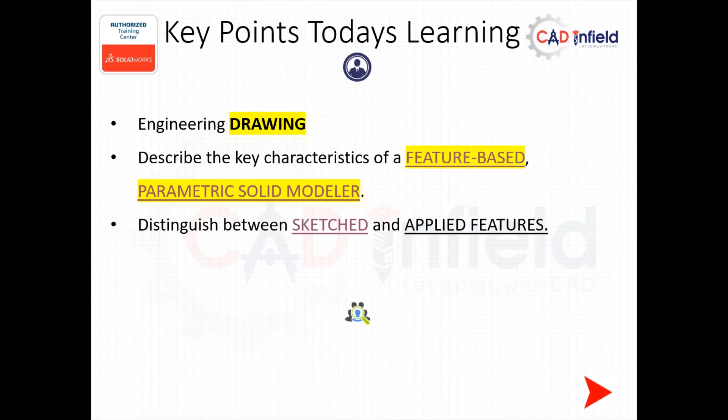We will also focus on basics, geometry, and shapes throughout the curriculum. We'd like to highlight topics related to CAD, such as what are sketch-based features, and what are the features responsible for applied features on top of features, so called applied features. I would like to brief you on some terms of it.

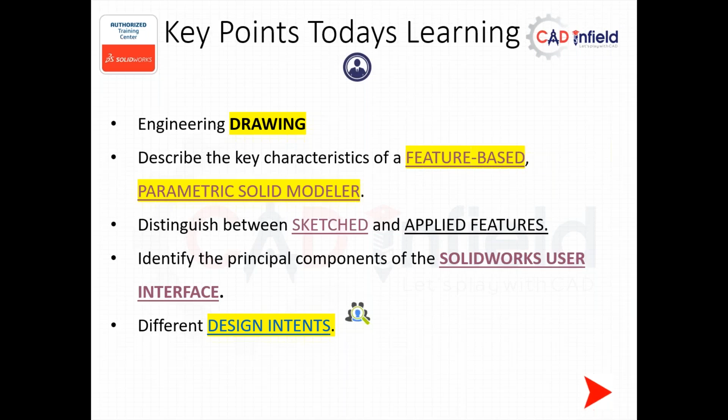Apart from this, I would also like to highlight the user interface of SolidWorks, and you will get the key highlights of it. Very importantly, I will call this a very important skill set, called design intent, and how this design intent is important in current industrial requirements, which I would like to highlight to you.

Finally, we will summarize with dimensioning methods, and conclude many parts of it through summarization. These are the few things I would like to highlight as the initial skill set and understanding of CAD and parametric design required, because traditional CAD is now obsolete. Now you need to think about parametric CAD. So let's click and start with engineering drawing.

So basically you people know that engineering drawing is mostly commonly referred to as engineering graphics in your curriculum. There are various terms used in industry for engineering graphics. Engineering drawing mostly communicates the information about an object. It is the most important aspect of mechanical engineering, as it is the fundamental need required to design and develop any single component for a machine or mechanical system.

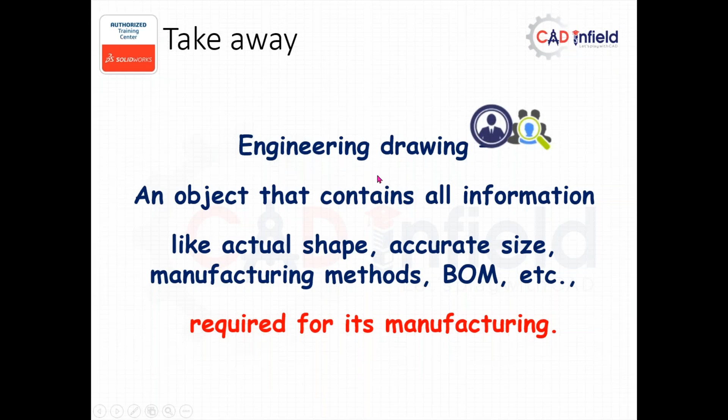By seeing a drawing as an engineer, you should be able to imagine the method of manufacturing it. Remember, this is a highly important part of it. Apart from the engineering drawing, if you are doing an assembly, then there's a mechanical BOM, call it an engineering BOM, and you should understand that as well. So let's add some more focus on the drawing part of it, and let's begin with this. In industry, in engineering drawing, mainly there are two subsets. I'm 100% focusing on the industrial requirement, based on what I learned through my past 12, 13, 14 years of design experience. So mainly there are two subsets of any component.

When we call it an individual component, a part, to represent the part we need a part drawing. To represent the assembly, we need an assembly drawing. If we consider the part drawing, we call this a machining drawing. All the components where parts are made with machining, for example lathe, milling, planer, shaper, drilling, all those traditional machining methods, or even CNC, where material is removed in terms of chips. These are the first criteria of engineering drawing drafting, which is all as per industry standard.

Next, there are sets of drawings which we call sheet metal drawings. We know that when a part, or plate thickness, is less than 5 mm, we perform various forming operations for it, such as bending, punching, blanking, notching, lancing, perforating. There are a lot of operations, where material is not removed in terms of chips, but formed instead. They use bending operation to create a blank, then do punching for all the holes, and notching to remove sharp corners. But all those operations don't remove material as chips, they form it. So there is some importance of sheet metal drawing in the industry, and how to represent that is an industrial requirement.

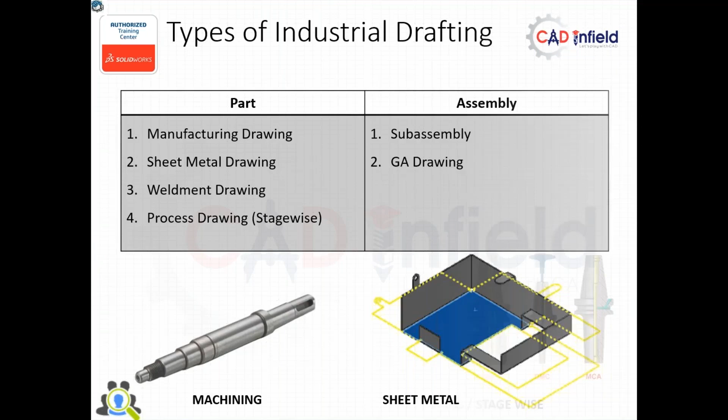Later part of it is the fabrication drawing. We call it weldment. I will showcase this to you also. Basically, just see this structural example. This allows you to create some amazing fabrication or structural drawing. You can't imagine this being made with the machining method. This kind of structure, can you create it with forming? No. Can you create it with machining? Not possible. Even welding is an essential component of the manufacturing industry.

Even machine beds, SPMs, robotics, automobile industries with chassis and structure, construction industry, aviation, marine industry, and many more, where without welding their work cannot be processed, because many complicated base structures, platforms, chassis, building structures, gates, fences, kitchen applications, appliances, vehicles - around 70% of components across industrial requirements cannot be made with machining or forming alone. We require weldment or structural fabrication for this. So this is a very important skill set required for industry: how do you create structural fabrications, how do you create the weldment? We call it a cut list or BOM for all the cut parts. That is also a very important thing.

Next part of it is process drawing. I've given one example where components are manufactured in a batch size, or in a lot, where n number of machines are in a series with n number of resources allotted. Remember the days you learned operation research subject - n machines, n number of resources and all. So one component is fixed initially at a chuck, operations performed on one side, then other operations performed on the other side, using traditional or CNC, VMC with multi-axis 2, 3, 4, 5, even now 7-axis CNC machines. You need to perform the operation, but you will not remove the component from the machining. All the required information related to that specific operation is provided on that drawing - only related with that machining itself, that machining drawing.

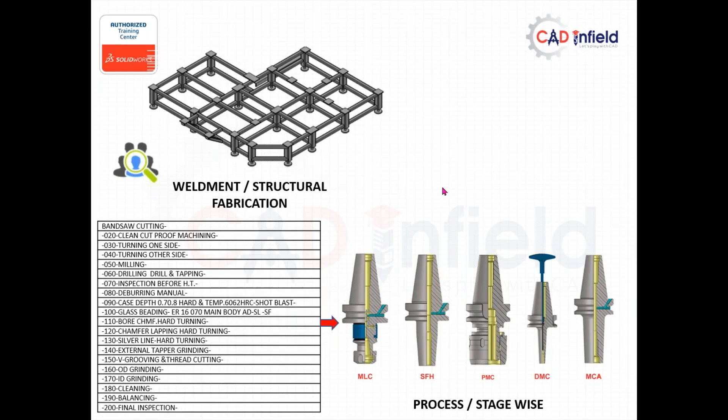Basically, any drawing element has a view, dimensions, tolerances, geometric symbols, finish, title block, annotations, and other things. And if we have an assembly, we need a BOM, exploded views, locating dimensions and all.

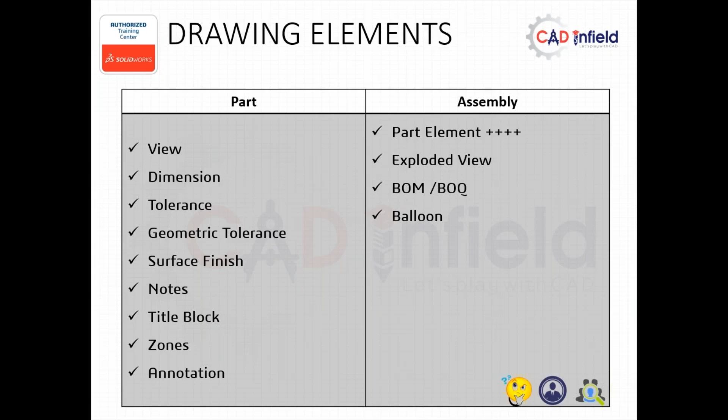But the most important thing is which drawing contains what kind of information. Because if we are going for a sheet metal drawing, apart from the view and dimensions, they also require a fabrication or development drawing, which you have to learn in machine drawing.

So they require a development drawing. Someone called it a flattened view of it. So for sheet metal drawing, if you are working on fabrication for sheet metal, the most important thing you have to highlight is the fabrication drawing.

And if you are working on a structure, there is no need to put up the fabrication or flattened drawing. You need to provide the cut list, meaning what is the section size, what are the dimensions associated with it. You need to provide the bill of material, called a cut list, because a weldment is a structure.

Few components are C channel, few are L angle, few are I beam. So you need the exact length of where to cut, and then you will get all the entire things over there.

So the core importance is, if it is machining, we require view, dimensions, tolerances, geometric symbols. But for machining, there is no requirement of any flat or cut list concept. There are no multiple bodies in machining.

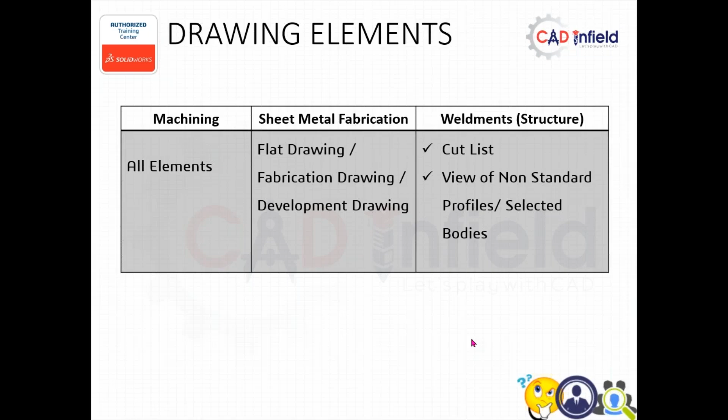Apart from this, I have highlighted a very easy way to understand these sizes, because many times for a fresher, a company is going to ask you the random size for A1, but I will tell you to just remember one size of it.

For example, normally we remember the size of A4, which is 210 into 297.

If you remember only one size, you can quickly learn the rest. A3 is equal to 2 times A4. It means we need to understand that if two A4 papers come together, we get the A3 size.

We know that A4 dimension is 210 into 297. Which is the highest number between 210 and 297? Obviously 297 is the highest. So for A3, the first dimension is the highest number of A4, which is 297, and whatever the lower dimension is, you double it.

Here you can see my mouse cursor, I can highlight through some spotlight. We know A4 is 210 into 297, but for A3, the highest of this is 297. I have taken 297 here, and 210 I have doubled it, so 210 doubled is 420.

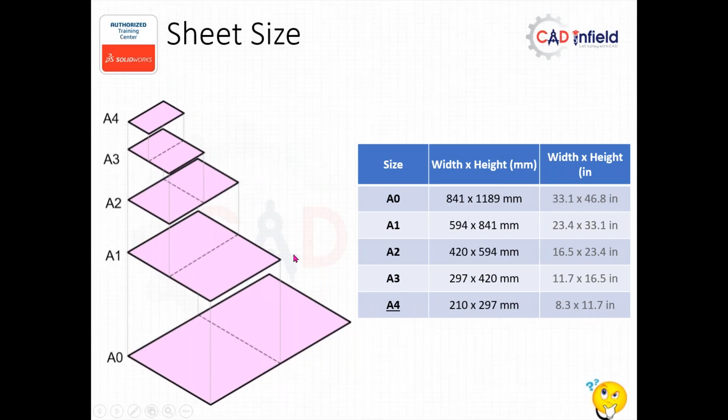The most important part, I will not highlight too much about it, just come with my normal drawing pad. The more is a projection method. Remember, this is for a fresher. This is a very important question, what is the projection method, because this depends upon the industry.

In a globalization world, many engineering services companies are working, sometimes on a UK British project, sometimes on a US project, or Singapore. UK or British people usually prefer the first angle method, but US people prefer the other. So we get confused about this, and you need to be fundamentally clear about the symbol also.

You must imagine what is the first angle symbol, what is the third angle symbol, how to draw that one. It's basically a custom frustum of a cone. This has a drawing, this has a skill set. There are two things I will tell you which will help ensure you never forget the symbol.

Always remember, this symbol does not have any dotted line. This is my first rule, this symbol does not have any dotted line in a symbol.

Second thing is that the observer direction is always from the apex side, or whatever the frustum of cone, the smaller size of the frustum is my observer direction. We know the rule.

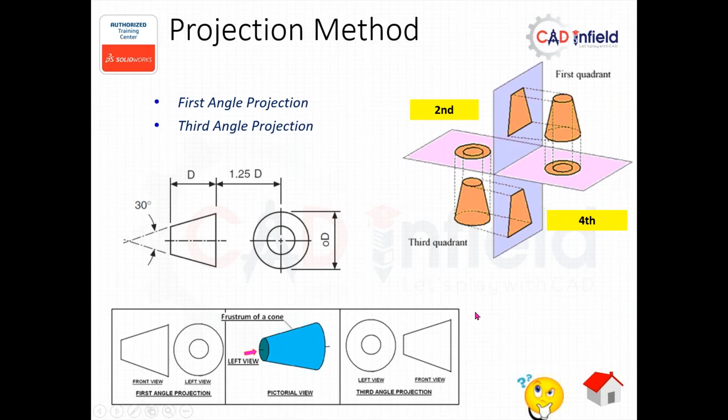So let us focus now on feature based modeling and what is parametric. We have spent a lot of time fundamentally on the drawing subject, because I feel that if you are a mechanical engineer, this is a must for you. You must be excellent in drawing, because whenever you work, whether in design or manufacturing, your communication language is drawing. This is a must criteria.

So let us focus on what is feature based modeling. The other name for feature based is history based software, or history based modeling. There are various researches currently going on. A model can be built by means of features. These features, technologically in terms of manufacturing, we call extrude, cut, hole, fillet, where we need to add or remove material from the component or raw material. At present, feature based modeling is one of the most common techniques used to create the solid geometry.

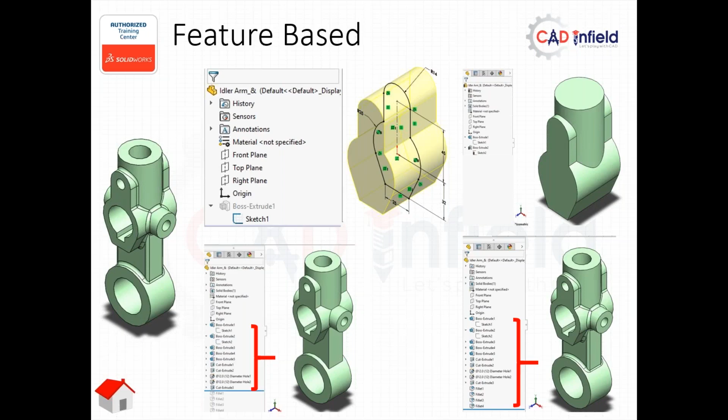Let's move on. The most important term is parametric solid modeling - very important, that's why it has a very high advantage. So what is parametric? Parametric is a term describing the dimension's ability to change the shape of the model geometry. As soon as you change the dimension value, your component will get modified. Understand, parametric is a term used to describe the dimension's ability to change the shape.

And to change the shape, we need to change the sketch. Sketches are created by using dimensions. So if we modify the sketch, automatically the geometry will get modified. Parametric modeling is also a modeling process with the ability to change the shape and size of the object as soon as you modify the dimension.

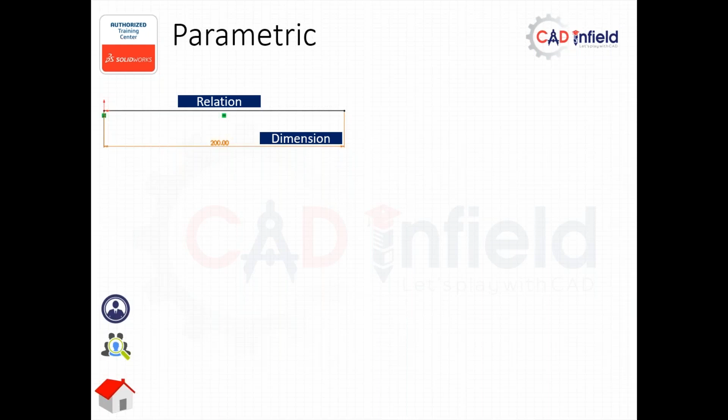Let's see the key advantage. If we go through the advantage of parametric modeling, it is basically used to set up a 3D geometric model. The shape of the model geometry can be changed as soon as the parameter or dimension gets changed. There is no need to redraw the sketch or redraw the geometry, and this saves a great amount of time for a design engineer. Even in the current globalization era, people need a quotation within a day or within two hours, else the competitor will kill the business opportunity.

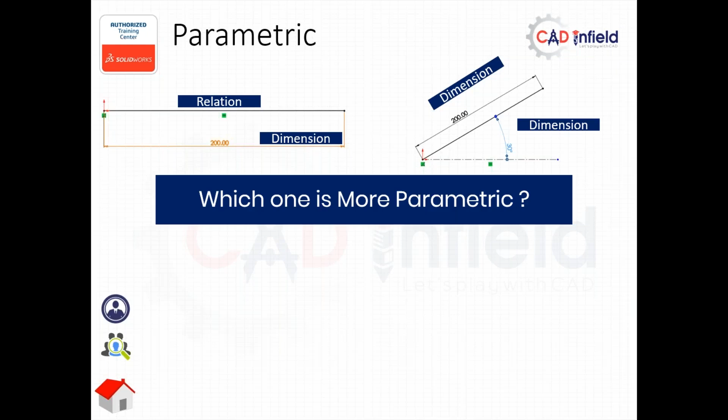So for parametric, I have given two examples here. In one, I have shown you the line with a length, with a dimension and relation. In the second, the line is defined with the help of two dimensions. So my question is very simple: which one is more parametric to you people? Can you think about which one is more parametric?

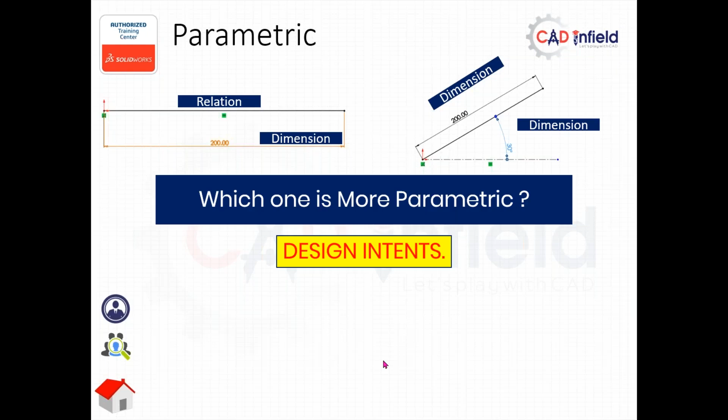Okay, let us have one example. Just let me change a few images. Have you seen these three images? My company is into material handling. I will give you the practical scenario. My company used to manufacture material handling equipment.

Basically, suppose my current object is a conveyor. So my product is a conveyor. Sometimes I used to get orders which are completely a horizontal conveyor, and sometimes I get orders related with the inclined, which we call a gravity conveyor. Mostly people use it where there is no need for any kind of motor. Due to gravity, the component will come down automatically. So what would you do in such cases? Because if you have a gravity conveyor and a horizontal conveyor as the same product, only sometimes you need to change the height of the conveyor, only on that one side.

So at that time, how can you say that your first relation will be okay? So, to specifically highlight the point, which one is more parametric? I say both lines are parametric. Understand what parametric means? Here we need to change the dimensions, but while creating the geometry, we need to think about the design intent. What does design intent mean? Design intent is all about how we can modify our existing design easily, so that a new design can be very easily created.

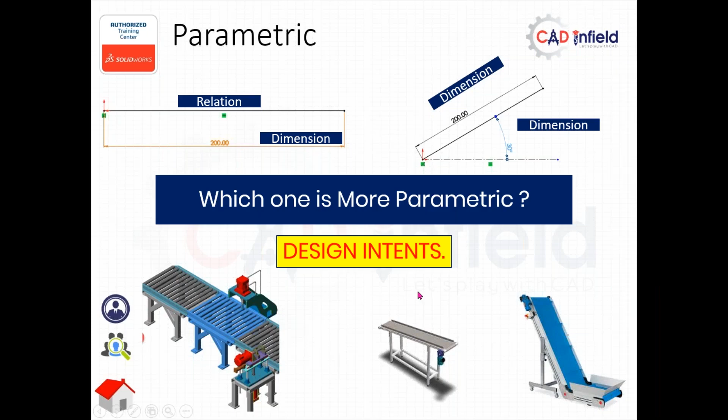For parametric, let's go a little ahead. If you consider parametric, there are two terms: driving and driven. Driving means those dimensions where the user has to input - I repeat, those dimensions where the user has to input. And driven means there are certain rules, logics, mathematics, trigonometric formula, some mechanical formula, whatever calculations, which depend upon the driving variable.

For example, suppose we have a plate with length 100mm, width 80mm, and we define a relation where length is my input, so I call it driving, and my width is always 80% or 0.8 of length, and my thickness is length divided by 10, or 0.1 of length. So if I have 100mm as the length of the plate, width automatically becomes 80.

If I change that 100 to 120, if my length of the plate is 120, I've defined a relation: 120 into 0.8 equals 96. And thickness is length divided by 10, so with 120 as my length, my thickness automatically comes as 12.

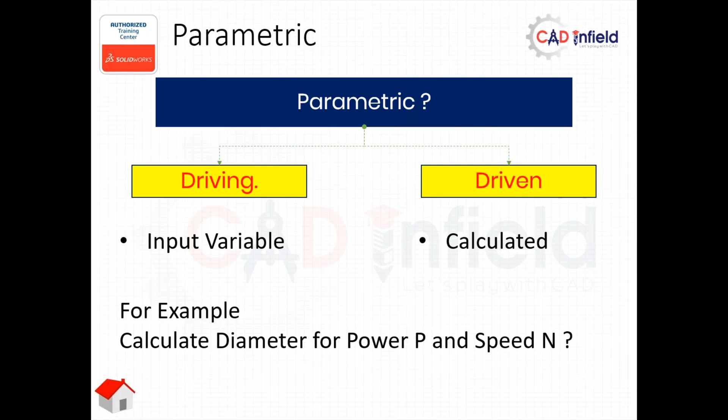Let's have a very interesting example. This is the problem: we need to calculate the raw material size where the shaft basically transmits a power of almost 200 kilowatt at 1200 RPM. Find the suitable diameter, given the maximum torque transmitted.

You might have heard the term factor of safety. Whenever we design a shaft for a ductile material, almost all the time it is ductile, we always consider this. If we know we want to design for a torque of X Newton meter, that's always my requirement, but I will never design based on exactly X Newton meter. I always add a service factor based on my environmental condition.

I will either take it as 2x or 1.3x or 1.2x. There are 2-3 service factors, either 1.2, 1.3, or 1.4.

So here, whatever torque is generated based on the 200 kilowatt power and 1200 RPM, we will get a certain torque. But if we design on that same torque, we won't have any factor of safety. So the condition is that you add 30% extra torque and then design, so that you become safer and get a good factor of safety for the design.

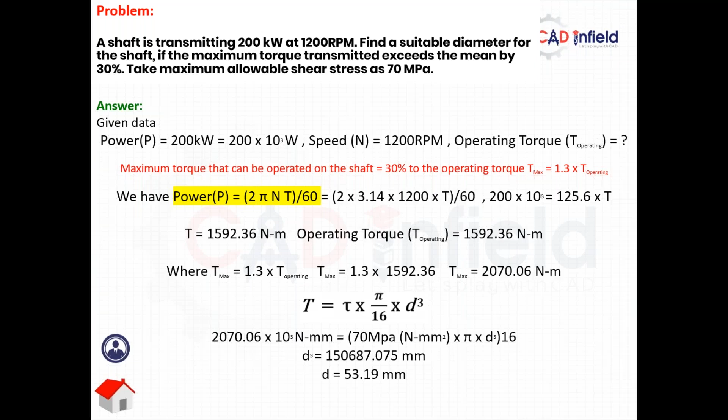Then we have to go for standard raw material shapes. From a raw material I cannot go into a lower size, because if I go into a lower size, I am already calling the failure towards me, and I also need to sleep. Because what happens if I design it, it's manufactured, and during working condition it fails, you can't imagine what will happen next.

I have gone through various such situations, and it's a very difficult time for designers. So he always thinks about some factor of safety, asks a few of his seniors, and then they design it accordingly. So this is what he has to think about, the calculation and what is needed.

Not only is calculation important, but you need to ensure whether the specific size diameter is available in a standard one. For the diameter we require a coupling, we require a bearing. So what is the standard size available for bearing? Whatever shaft we design, is a similar standard bearing available for that dimension, yes or no. Is a standard coupling available, yes or no?

Because you can't use non-standard items, since non-standard items increase the cost, increase the time, increase the delay. And if in service condition a non-standard item fails, we need to either maintain an inventory, or imagine a motor-gearbox coupling used for a crane — if that coupling fails, what will happen? You can't run the machine until it's replaced.

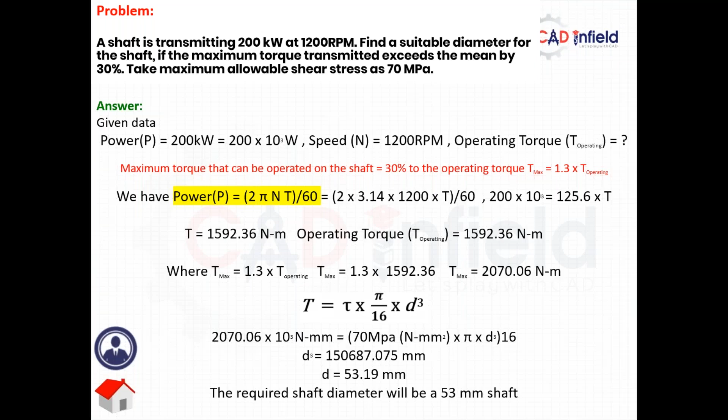And if it is custom made, meaning made for a specific purpose, imagine till the time — if you have inventory inside, okay, but if you do not have inventory, you can't imagine the pressure that comes. It's highly difficult. These terms are extremely important as far as the industry is concerned.

That's why I have focused on parametric feature-based history. It's a step-by-step procedure, whether it's a CAD modeling method or a manufacturing method. For a revolved or cylindrical component, a symmetric component, the term is called a feature. I'll tell you more about that later.

The next part of it relates to CAD sketch features. What does sketch mean? It means for any geometry — if I want to draw any geometry, I need two things: a geometry as well as a dimension for it. So how do we handle all of this?

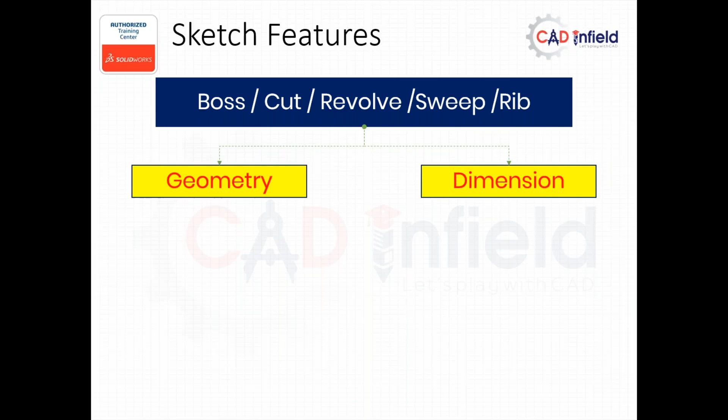Geometry means we have some basic shapes — for example, a cylinder, a cone, a pyramid. Or we need to use a combination of basic shapes, and from that combination we can get a specific geometry. So understanding the geometry is key. Tomorrow's class will focus on various sketch relations and their geometry. My first purpose is always to tell students to focus on geometry first, because if you know the geometry well, you can be a very good designer. We are not interested in you people becoming just a modeler.

Okay, so for a designer, geometry understanding and design calculation understanding is the most important criteria.

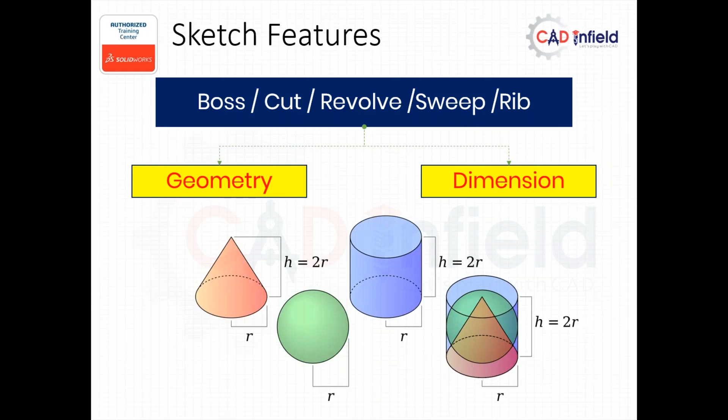Sketch-based features are those features which require a sketch to be drawn. For example, I require a plate - so I have to first decide whether it is rectangular or square. If I want a circular plate, I need to draw a circle, or a triangle, pentagon, whatever. I want a cutout - whether it is a circular or square cutout, what kind of cutout? I want a revolve - whether it is a single step shaft, or a 2-3 step shaft. So anything which requires a sketch to be drawn is called a sketch based feature. Very simple term - you initially need to draw a sketch, that's called a sketch based feature.

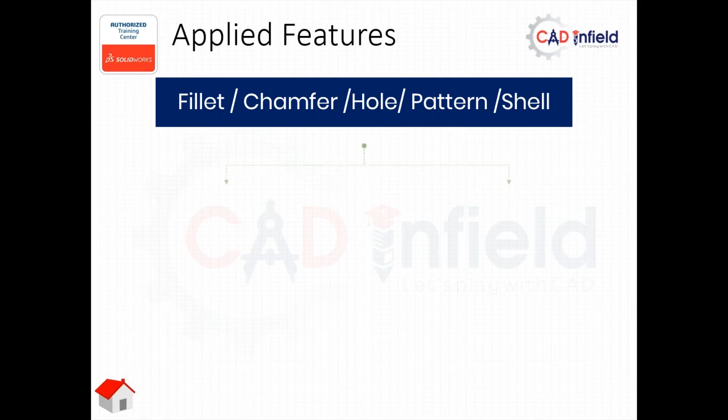Applied feature - it means what? You already had created a few features, and now you want to create a few features on top of an existing feature. So I have an existing geometry and a dimension input. For dimension input, I mean I have an edge and I want to do a fillet. I have a face and I want to do a hole. I have a box and I want to do a shell. So either I have an existing geometry and one dimension input which is required for an applied feature.

It means for fillet, I have a radius. For chamfer, I have a dimension. For a hole, I have an M8, M10, or whatever size. For pattern, what is along X, what is along Y, what is the pitch - those dimensions I have.

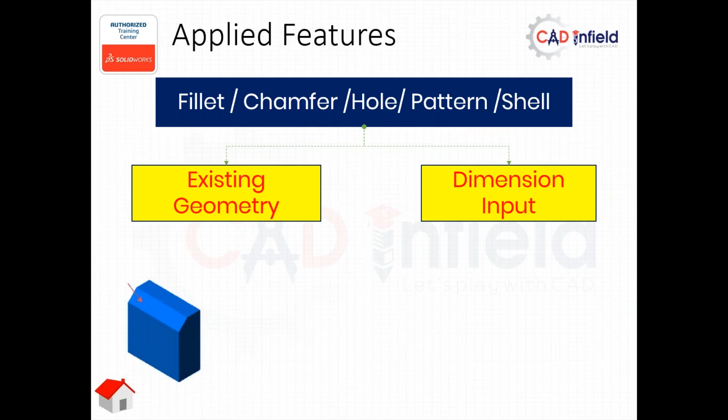So all those things - I have existing geometry, I did a fillet chamfer. I have existing geometry, I did a fillet. I have existing geometry, I did a hole. I have existing geometry, I did a shell. So all those things do not require any sketch to be drawn. Here I only have to select the edge. Here I only have to select the face. So that is called a feature based or applied feature - a feature on top of feature. It does not require any geometry to be drawn; it will draw automatically. You just need to select either a face or edge of the component and you are done with it. Very interesting, very easy to understand.

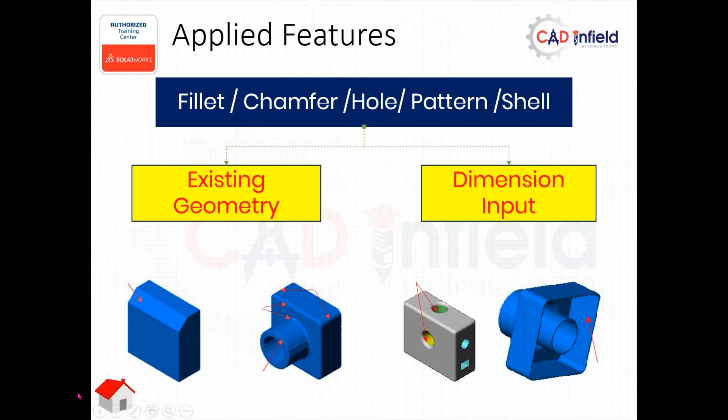Once I have selected the part, I get one graphics UI which is constant. You can change the color combinations and all those things. We have only one graphical area where we draw the sketch, part, assembly, everything. Currently I am inside a part, so I will obviously create either a sketch or a feature on top of it.

Next, every software has a menu button - Word, Excel, PowerPoint, everything. You have File, Edit, View, Window, Help - all options available. So that is called the menu bar, which is on top of every software everywhere. This is common here also.

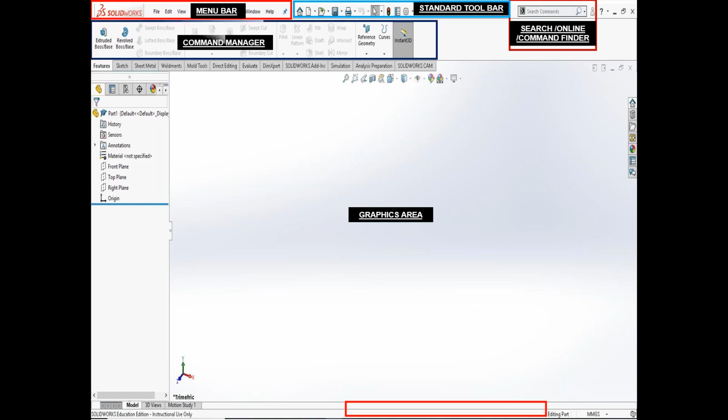SolidWorks very handsomely has, first, a command manager. This command manager changes specific to the command tab, which is highlighted in yellow color. So command manager and command tab: every time if you select a feature from the command tab, you will get all the commands related with the feature. If you select sketch, you get all commands related with sketch. If you select sheet metal, you get all the tools related with forming tools. If you select cam, you get all the tools related with cam. So very intuitively, all these commands and their location are very fixed.

This is on your top, which is called the heads up toolbar. Many times you require zoom in, you need to change views, create a section view, you need isometric, front view, top view, show or hide plane, axis, set sketches, CG, many things. There are many shortcuts also available, but all those things you can get here. Even you can change the background, create something new, utilize a machine shop background — everything is possible in the heads up toolbar menu.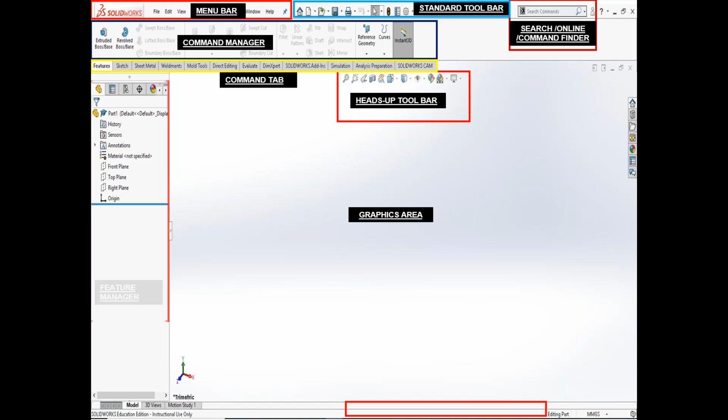Very handsomely designed, and this is the most important one: the feature manager. This feature manager again is subset into different commands — I will go into my next slide where I will explain in detail. The reference triad, which is at the bottom, gives information about the plane, your coordinate system, X, Y, Z points, from which you can specifically go into the plane. If you select front view, it will give you X, Y. If you are in top view, it will give you X, Z. All depends on this, so that you know whether you are working on positive X or negative X, positive Y, all related to the coordinate system. Don't worry too much about it.

This is the standard document window, and the document window is basically where you need to create the graphics. SolidWorks always has a single document window for creating the 3D geometry, but simultaneously, if you want to create some mechanism, animation, or motion, definitely there are n number of motion studies — 1, 2, 3, 4. You will get it even for FEA, you will get multiple windows, but for modeling geometry, you will get only a single environment in SolidWorks. This is an interview question asked sometimes.

So another part of it is what we call a task pane. Many times the task pane is used to speed up operations. Task means something which needs to be done very fast, very accurately, very quickly. So those things we can get in the task pane.

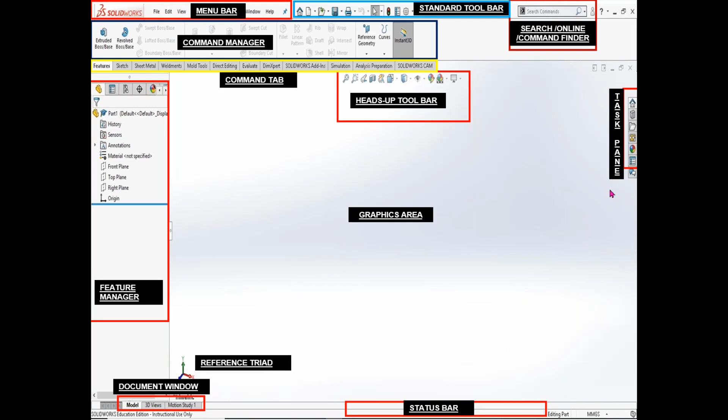Okay, we are very close to our finish time. So this is the feature manager. I've told you that the feature manager is divided into various small commands, so let's move on to the different commands. We'll get the feature design. I will open up everything because I found a little delay for you people, so I will ignore the animation so that you can get all the tools at once, and then I will explain one by one.

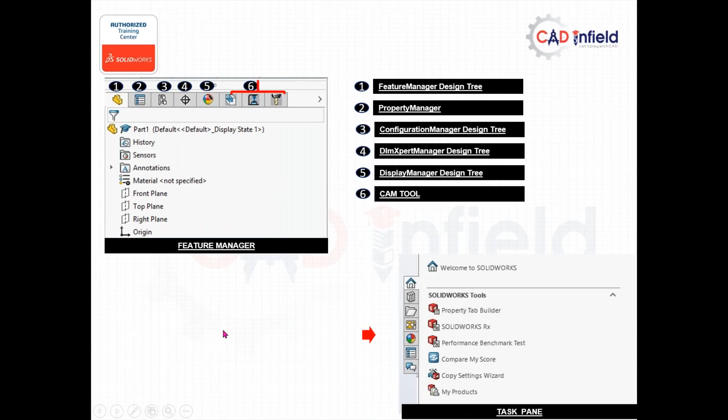Next part of it is a task pane. Task pane is also, we have a few things where we can get the design library, we can get the appearance. The appearance in feature manager is related with the color only, but appearance in task pane is related with the scene.

It related with the texture. It's related with decal, related with the logo. It means you want a grass, you will get a grass. You want some feel like tire or rubber, you will get that one. You want something related with furniture kind of a thing.

So it gives the texture also, but whatever the appearance we saw here in the fifth column in feature manager, this is only related with the color. It is related with the RGB color, but here you can add on top of it a texture also. Apart from this, we have a custom property.

Every component has some certain properties. For example, if I need to be identified, I must have my name, my father's name, where I'm located, in which city - all the information related with this.

So for example, any component has a part number, description, material, then what kind of finish it is. All the information related with the manufacturing of that specific component is called custom properties, which will be utilized for engineering or manufacturing BOM. I will tell you in a later stage what is the difference between the engineering BOM and manufacturing BOM.

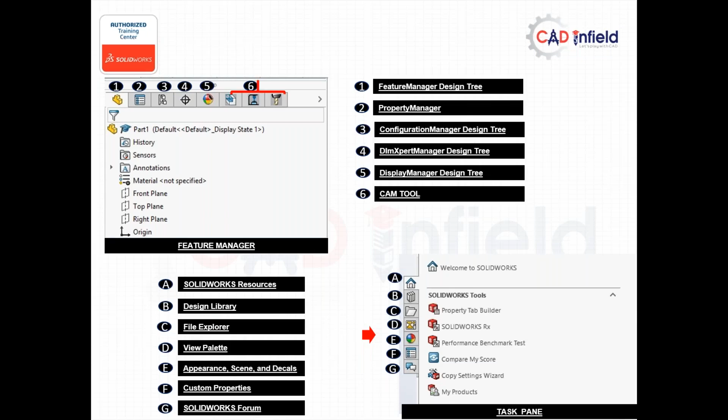You also want to participate in the forums, blog. You can get a lot of videos of mine also in the blog and video forums. So this is related with the technology topics, and these are the tasks where you want to speed up your operation, that is located in the task pane.

So we saw what is SolidWorks, what is feature-based modeling, what is parametric. One term is fully associative. We call it that if you change your sketch, your part will get modified. If your part gets modified, your part drawing will get modified. If your part gets modified, your assembly will also get modified. Assembly drawing will also get modified. So we are doing changes from sketch to part, part to part drawing, part to assembly, assembly to drawing. So this is one way of communication.

If you use the model items, which is automated dimension in SolidWorks - suppose you did changes in a drawing for a dimension, it will change the assembly, it will change the part, it will change the sketch, but it should be model items only. So this gives bidirectional associativity.

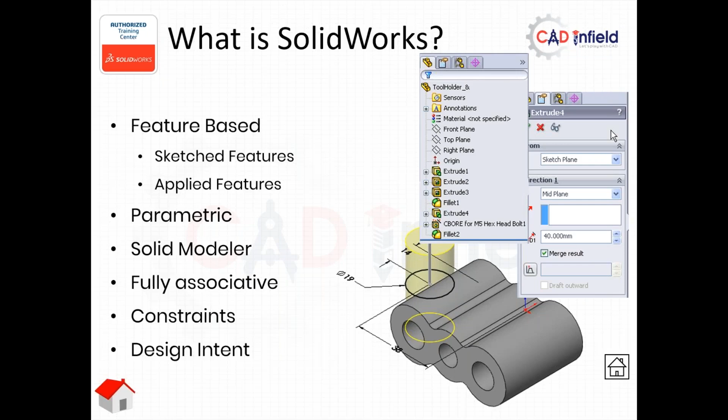So fully associative means how you are connecting. It means I'm doing the changes into a sketch, but my assembly is not getting modified, so there is no meaning to it. So this is again a must - every time you need to ensure that whatever changes applied on a sketch has to be applied. You need to rebuild in some software, it's called update and all, but SolidWorks has very handsome associativity related with this. You will get it easily.

This we discuss about design intent, where this is the purpose. We discussed during parametric also how the design intent plays an important role. Design intent means your model's behavior once you did the changes, or how do you create an existing geometry so that once a new requirement comes and you make certain changes, whether it is very easy to modify or it creates a challenge. So that needs to be very carefully planned.

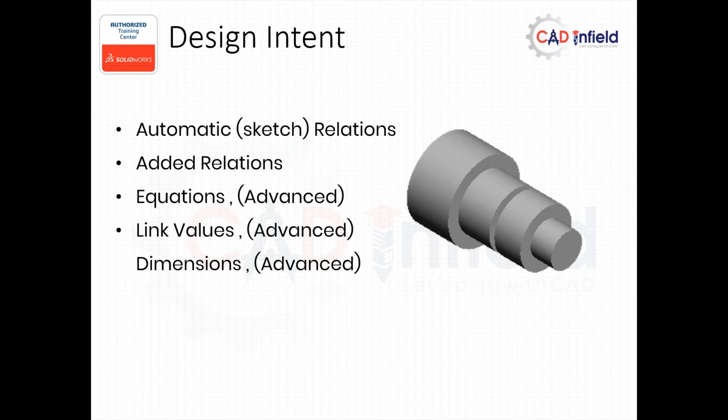So that is to be called design intent. Design intents are done with two things: one is dimensions, two is relations. There are two things - equation, link value, creating some logics and all. I will not go in detail because of the less time, but this is a must. I have taken one part of design intent which I saw - I thought it was really highly important, which is relation.

Every sketch entity, such as a line, may be a horizontal line, vertical line, or a line where we have coordinates. From where does that line start? If it is origin, my coordinates are 0,0, so I must have a coincident relation. It means there are a few sketch relations that are independent. A line being horizontal is independent, but there are a few which are dependent.

For example, I want a perpendicularity. The first question that comes to my mind is: perpendicularity with reference to what? So I need to define a second reference for it. So whatever, or if we want a co-radial, it means the radius must be the same.

So what is the first radius? Concentric - to whom do I have to make it concentric? So it depends upon the other. Tangent - so I require a circle and a line, so that comes as a tangent. So we need to think on that.

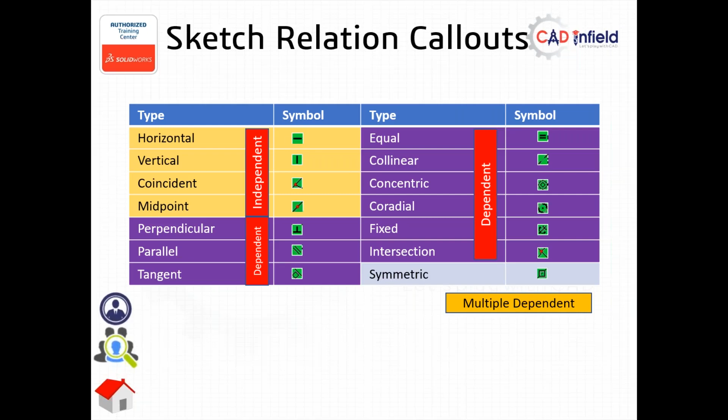Or even symmetric also be something where we need to think about where multiple dependents are there. We can work on a relation where maximum relation, minimum dimension - if your design intent allows, that is the best modeling practice, best parametric modeling practice that is going to be considered.

There are different dimension intents. It means whether you are giving a pitch on one side of the dimension, or instead of pitch you have defined the end-to-end dimension - this is called a multi-reference dimension - or you are defining pitch and symmetric dimension.

So this completely depends upon how your plate is going to get modified. If you do certain changes, what will happen to this? Suppose initial plate length is 200 mm. If I modify it to 300 mm, whether I need that hole pitch to remain same, or I need that hole pitch to also be changed - so you need to think.

A very small thing, defining the dimension for the hole. But if you want to think on parameterization, think about whether if I define the edge-to-edge dimension, what will happen? Because suppose I'm using a mold, I have a mold base - at that time I always think that the mold base varies in a symmetric way. So I always use the last case, which is defined as a pitch and symmetric relationship.

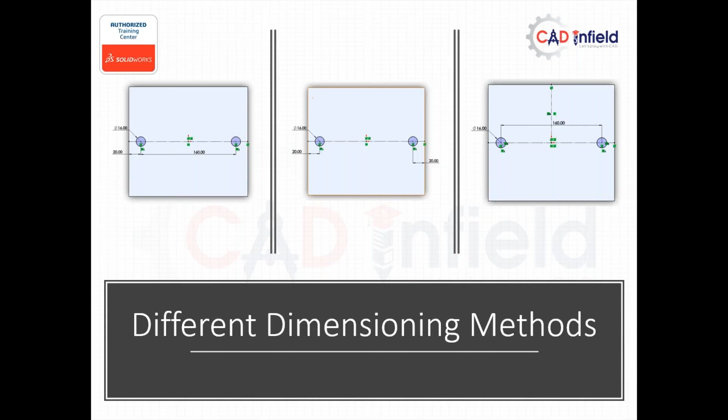Takeaway - I think we are late by 5 minutes, but to conclude the session quickly, we know the importance of drawing. Engineering drawings are worth more than a thousand words of pictures.

What is industrial drawing type? What is manufacturing drawing? What is fabrication drawing? What is weldment drawing? There are types, and each drawing contains different information related to it.

What is parametric? What is the importance of parametric? Why does industry want parametric design? Why are they going for what's called a feature-based kind of thing, or why are people looking for history-based software? Why are these things important?

We also saw the SolidWorks interface there. A few things, or all the things, are very clear to you. All the shortcuts which we used to use with Microsoft - all those softwares are tightly interlinked with SolidWorks also.